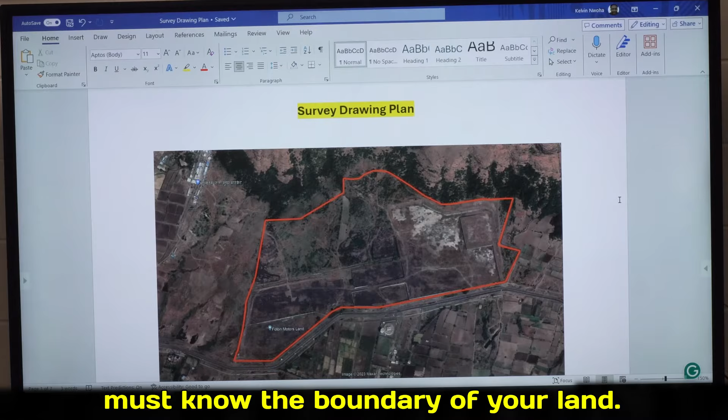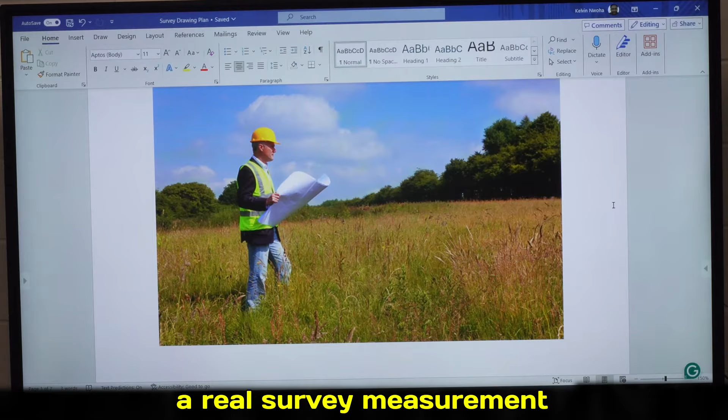If you work in the construction industry, you discover that the work of a surveyor is very important. You don't construct to go into somebody else's property. You must know the boundary of your land. When you call a surveyor, he will go to the land and take a real survey measurement using surveying instruments. They will record it. Then you should think of positions where the property will be.

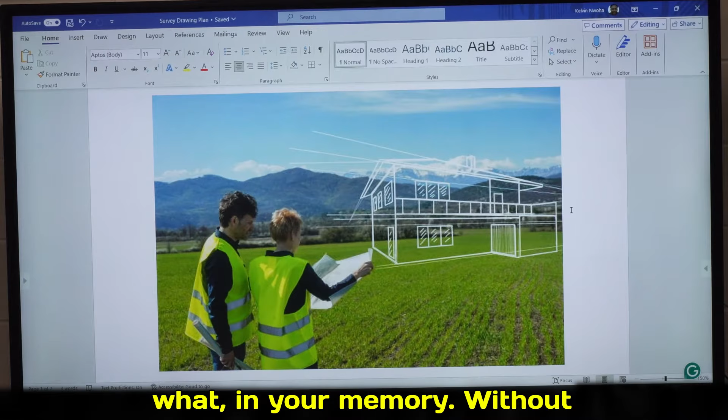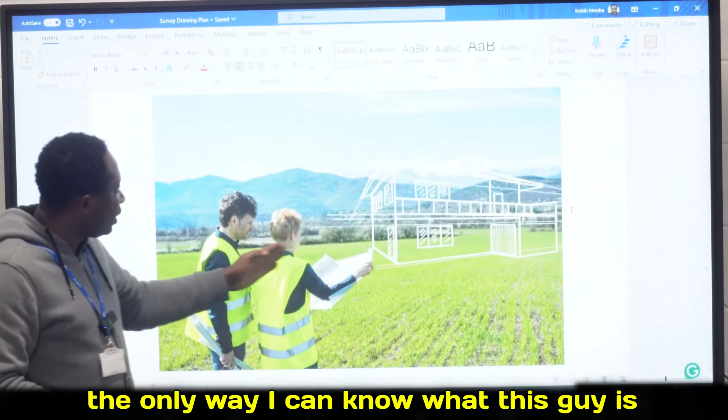Virtually, you are planning. Everything is happening where? In your memory. Without drawing, how will I know what this guy is thinking? What you're seeing here is happening in his head. He's thinking: this is the land, this is what I want to do. If this thing is in this guy's head, the only way I can know what he is thinking is through AutoCAD or any other CAD software, because this is virtually happening in his memory. He's looking at this paper and thinking this. That's why it's important that everybody should know how to draw.

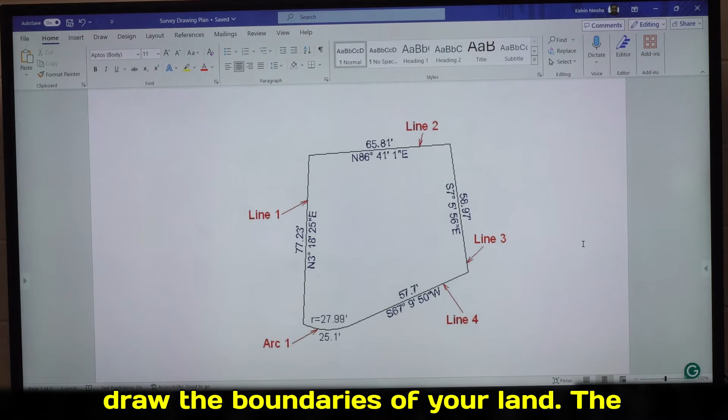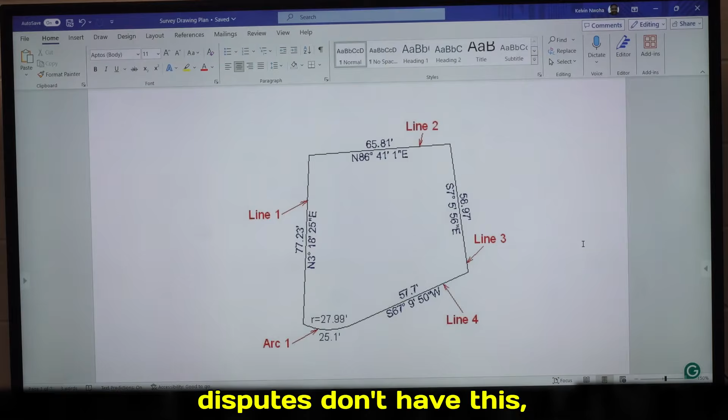The next thing you should be looking at is, how do you draw the boundaries of your land? The surveyor has come to the land, used his instruments, and gotten all the dimensions. There could be land disputes in the future. The reason why the United Kingdom and many parts of Europe have less land disputes is because of this on the screen. Many countries that have land disputes don't have this. They just rely on, my father told me that the boundary was there, and they will start fighting. And before you know what's happening, two villages are already fighting because of that land, because they don't have a record of survey boundaries.

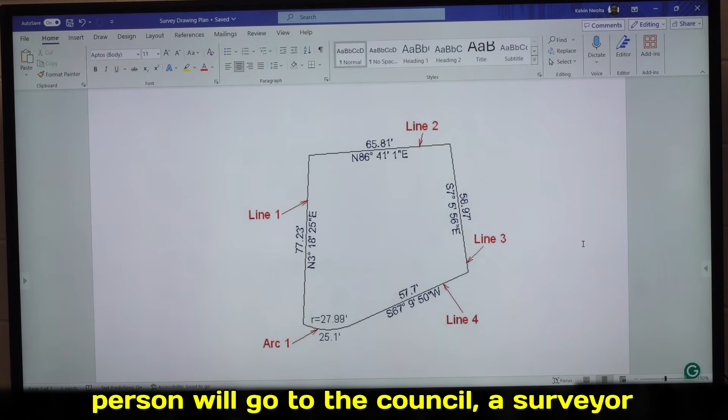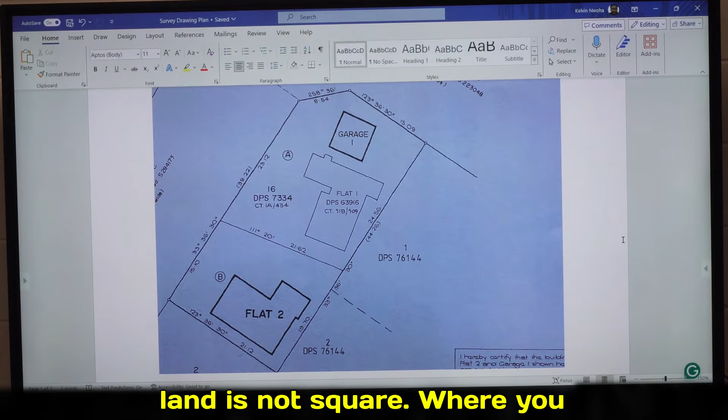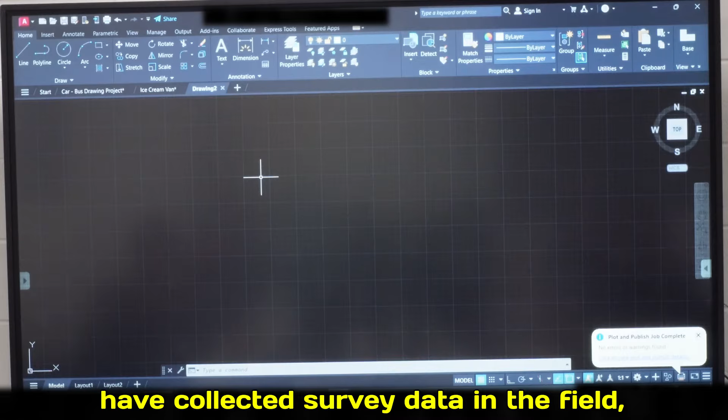In the UK, if you trespass, the other person will go to the council. A surveyor in the council will bring out this, and in court, they will tell you who trespassed, because the records are there. You can use CAD to design how you want your land and the buildings to be arranged. No land is perfectly square. It's your house that is square. The land is not square. Where you live, the land could be like this. What we want to look at now is how you have collected survey data in the field, and you now want to represent it in AutoCAD.

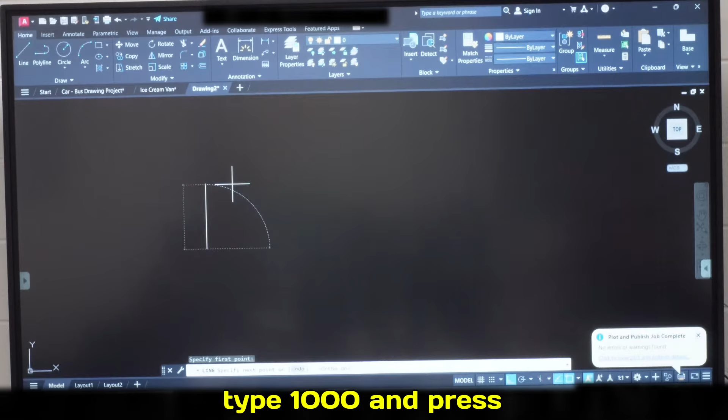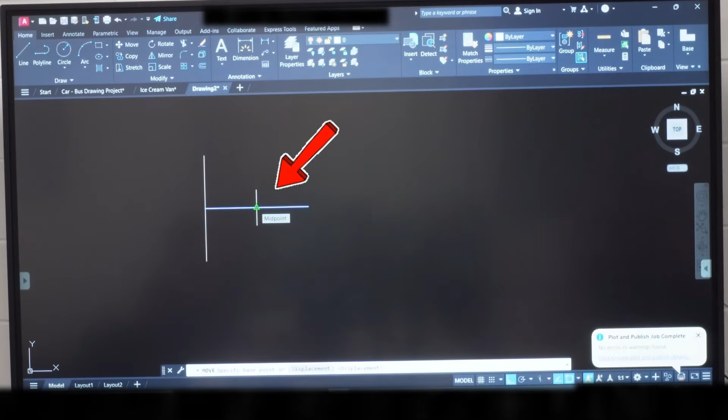I will turn off my grid lines, but before then you open a new CAD environment. Step number 1, pick the line tool. Pick a point. Next, make sure your ortho is turned on. Direct your mouse up, type 1000 and press enter twice. Next, pick the line tool again. Locate the midpoint. Click. Direct your mouse towards this direction. Type 1000. Enter twice. Next, click this. Click move. Locate this midpoint. Click and click this end so that you have a cross like this.

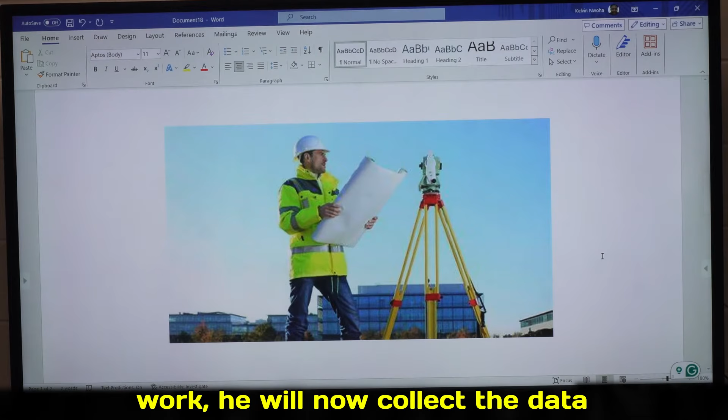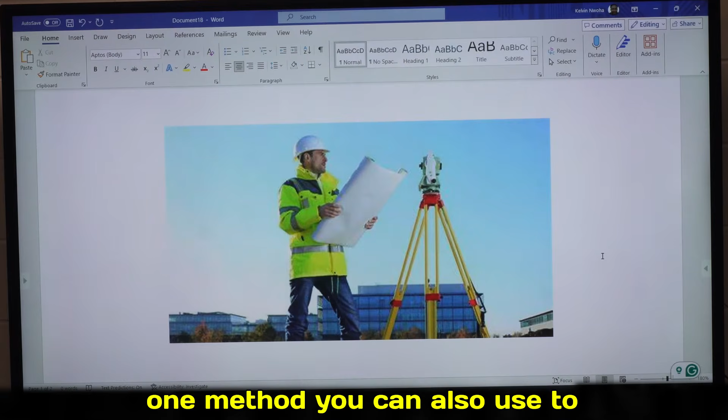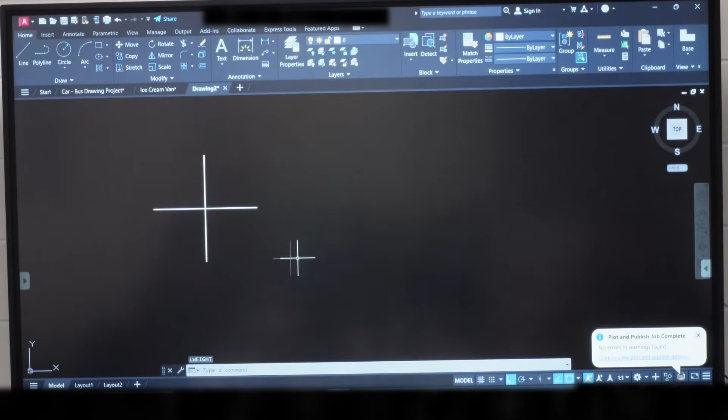After a surveyor has done his work, he will collect the data and go back to the office. There are many software that can help, but this is one method you can also use to represent what you have collected on site. This is a station. I will highlight this, go to line weight, choose 0.3. Type line weight. Press enter. Check display line weight and click OK. I will highlight this. Change the color. Let me just go for yellow and press escape. I will highlight this, type group and press enter. This is station A.

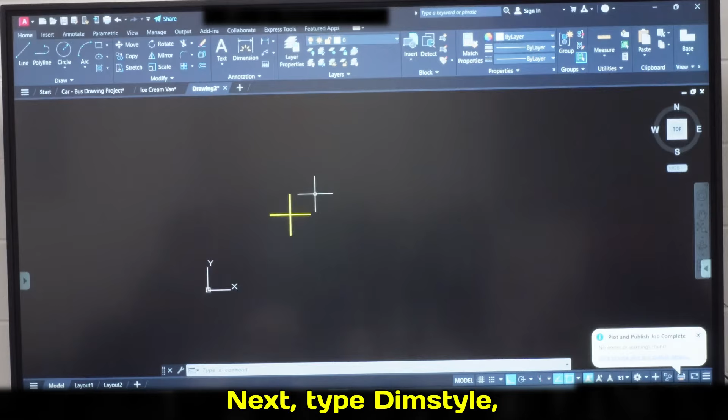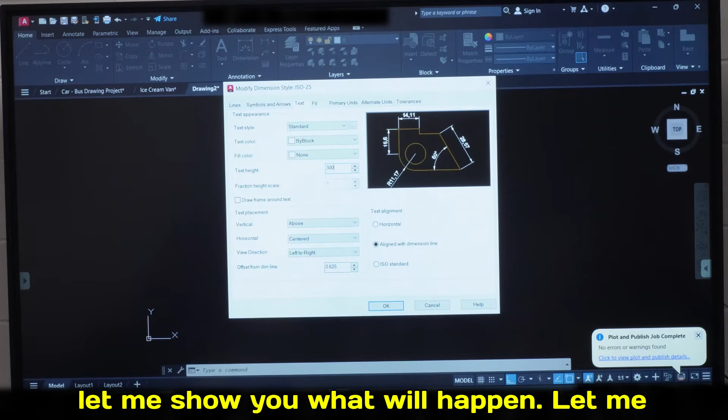Next, type dim style. Dim style is dimension style, and press enter. Click modify. In this dialog box, click text. Change this text to 300. If you don't increase this text, let me show you what will happen. Let me cancel it. If I come here, you see text, and I click multi-line text. I click here. I will type capital letter A. If I type capital letter A here and click close, do you see that it's so tiny here?

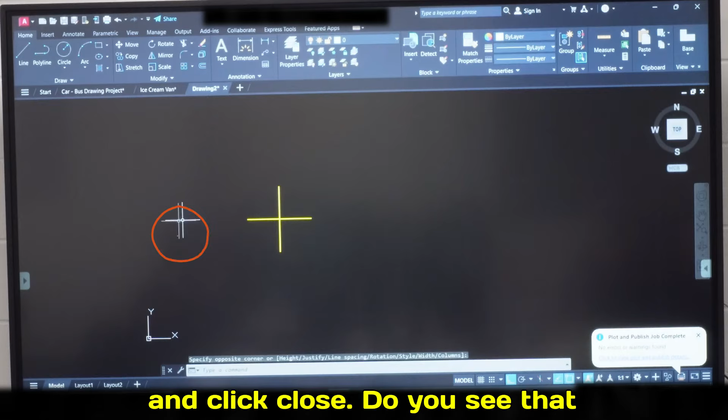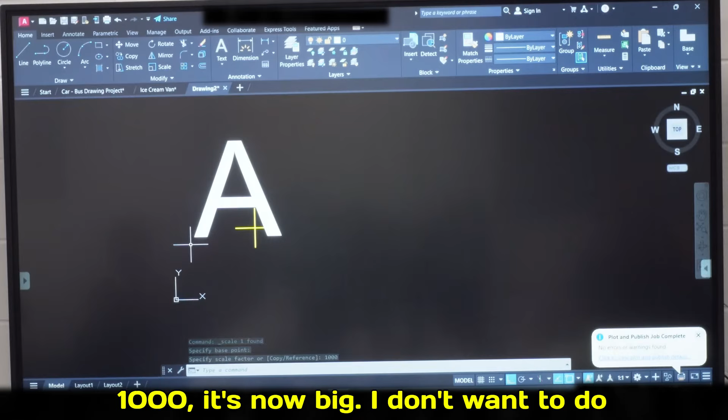If I keep zooming in, it's there. The only way I can make this big is this. I will click this. I will say scale. Click on it. If I type 1000 now, I've scaled it to 1000. It's now big. I don't want to do this. That's why I want to go and change it before I type it. I will click this and delete.

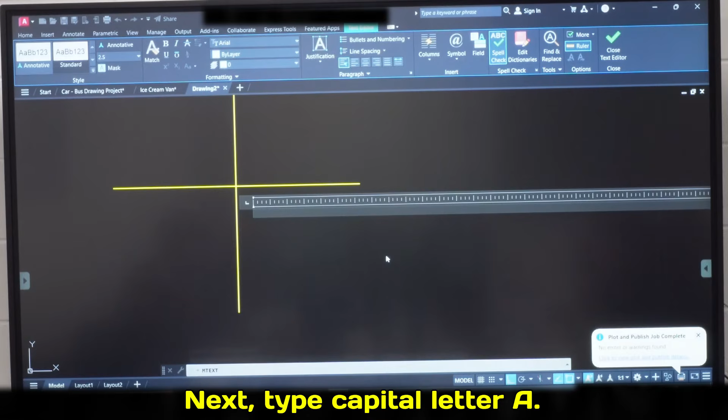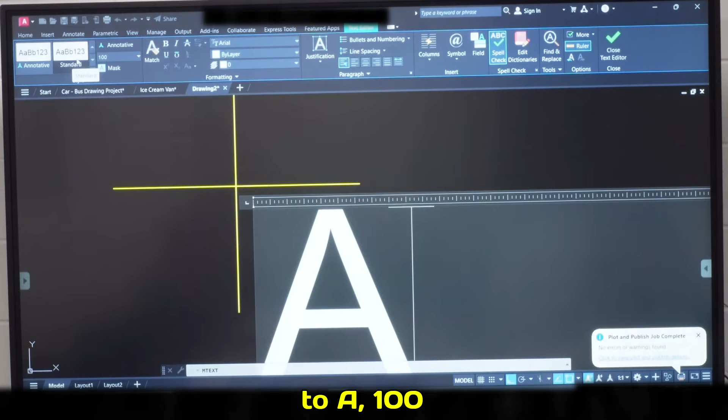Everybody click on this multi-line text. Click twice, 1, 2, and release your hands from the mouse. Next, type capital letter A. You see here 2.5, but you have to highlight this and we're going to increase this. So I will highlight this A. I will change this to, let me say 100, and press enter. 100, close. Can you see I have increased the text? Then you close. I will click on this, click scale. Click on it and type 3. So I've increased it and scaled it up to 3. So let's leave this here.

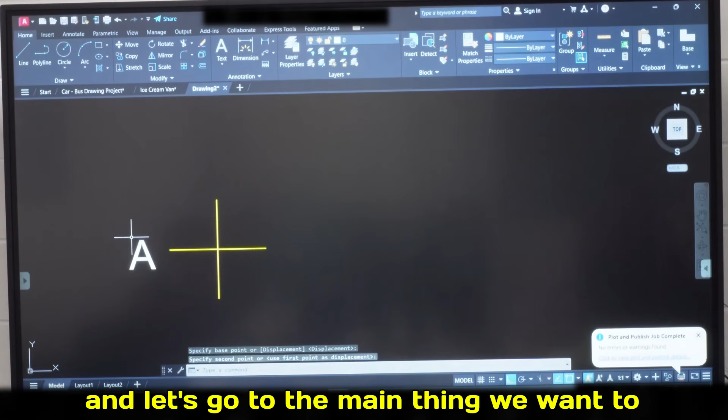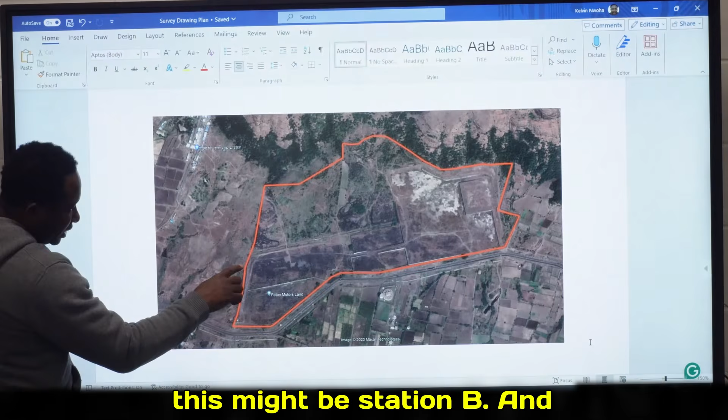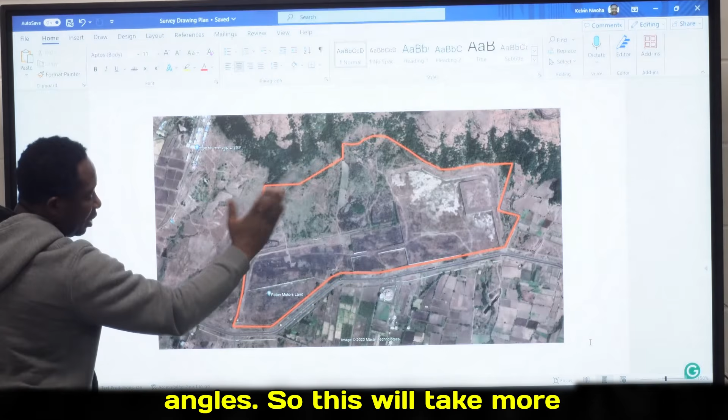And let's go to the main thing we want to do here now. The A means station A. Now I am moving from station A to station B on the boundary land. This is station A of the property. This might be station B. And this is station C. Station D. So here we have so many points. Each will have a different angle, so this will take more time for the surveyor to complete. If it is square, it will be easier for the surveyor. From station A to B is 38 meters, which is 38,000 millimeters.

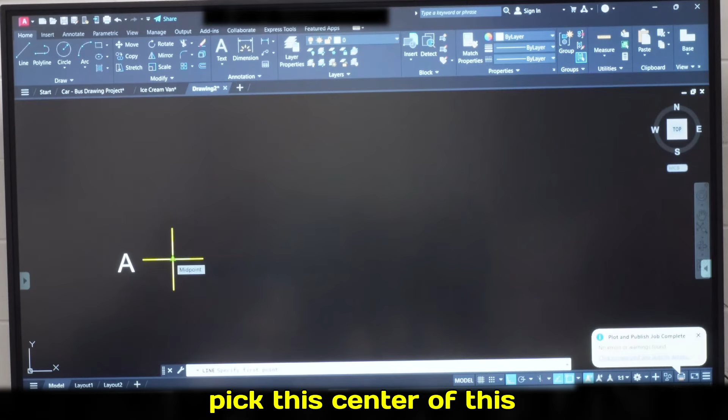I will pick line, pick the center of this cross. I will direct my mouse up, type 38,000 and press enter twice. Next, I will click this line, zoom in. I will click rotate.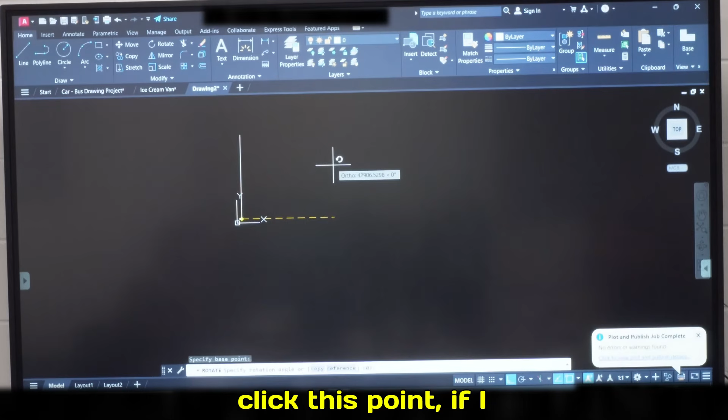Click this point. If I type 33 degrees, AutoCAD will move in the anti-clockwise direction. Watch. If I type 33 and press enter, AutoCAD moved in this direction. But I have entered somebody else's property. I will do Ctrl Z.

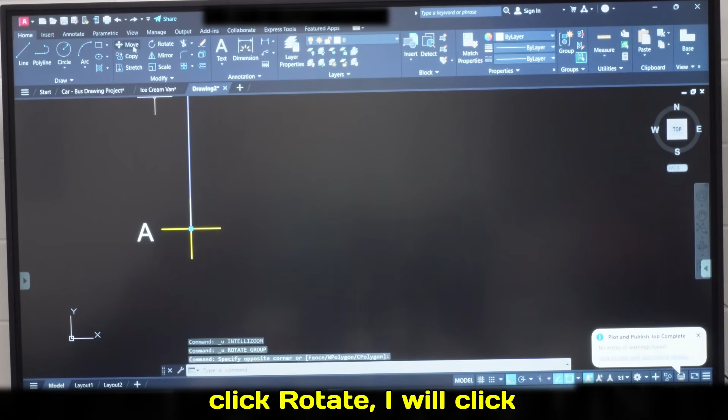I will click this, click rotate. I will click this point. I will type minus 33. Press enter. This is the direction of my property now. Let me move this off here. This is the direction of my property. Let me check if it is correct.

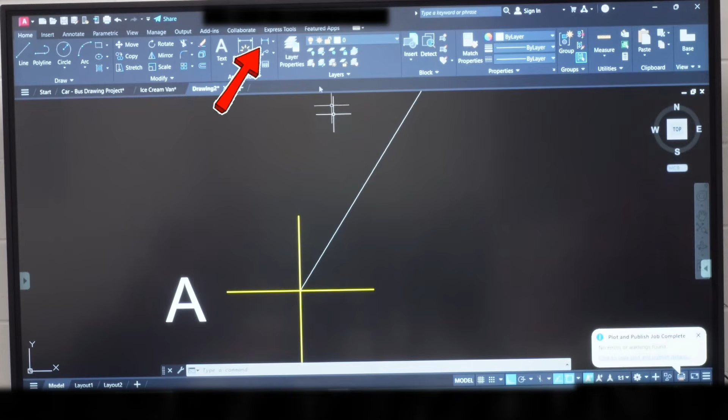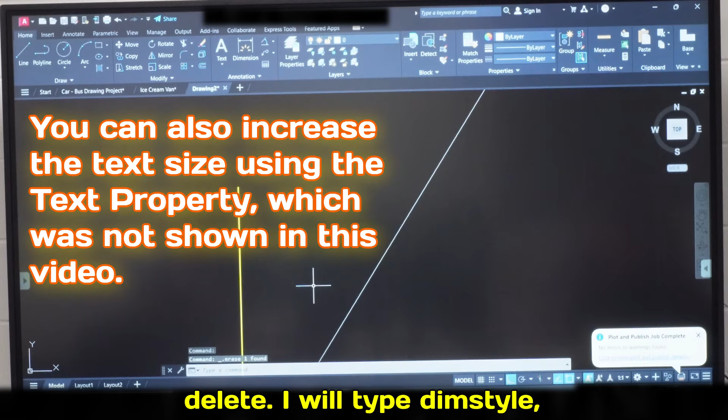I will come here and click angular. 1, 2. Now I will increase this 33 degrees. That's the direction of my property. For me to increase this, you see this is tiny. If I want to increase this, I will delete. I will type dimstyle. Enter. I will now click modify.

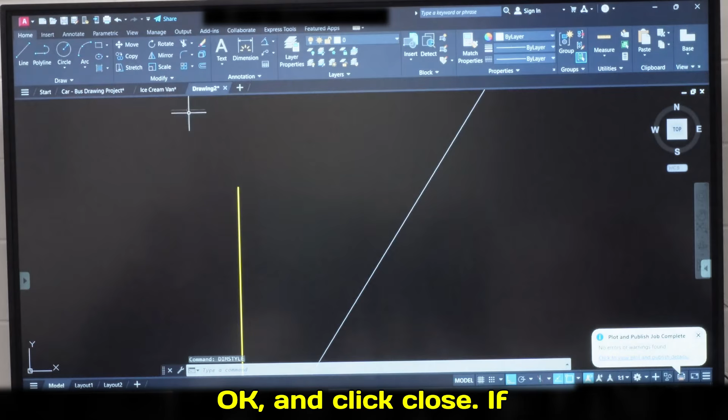Go to this text. I will increase this text. Let me say 300. I will increase this arrow to 100. Click close. OK, and click close. If I do this again, you see, it's now big. I think I will even reduce it. That 300 is too big.

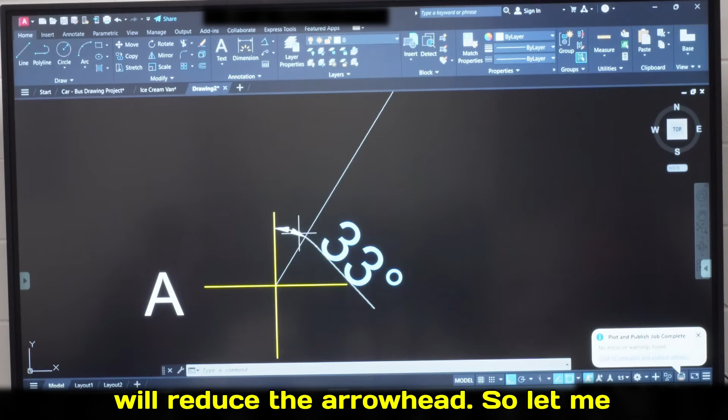But at least I can now see my text clearly. I might reduce it to 100. It's just too big. And I will reduce the arrowhead. So let me click this, delete, dimstyle. Let me go and reduce it, modify. This arrowhead, I will reduce it to 50. The text, I will reduce the text to 200.

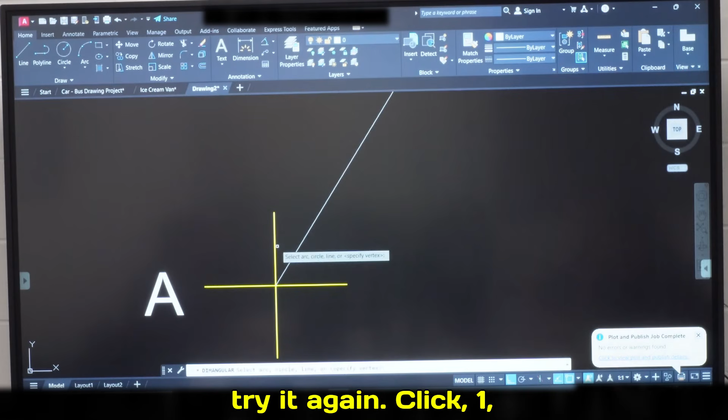OK, close. Let me try it again. Click, 1, 2. I think it's a bit smaller now compared to before. I will click this, click copy. Click this midpoint and go to the other end of the line, click and press enter. Now I am in this position.

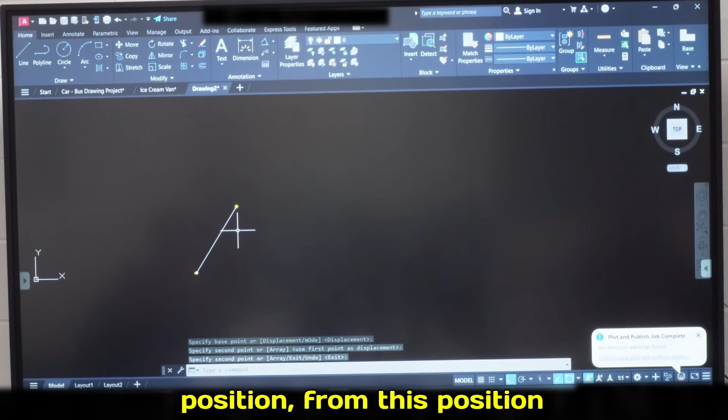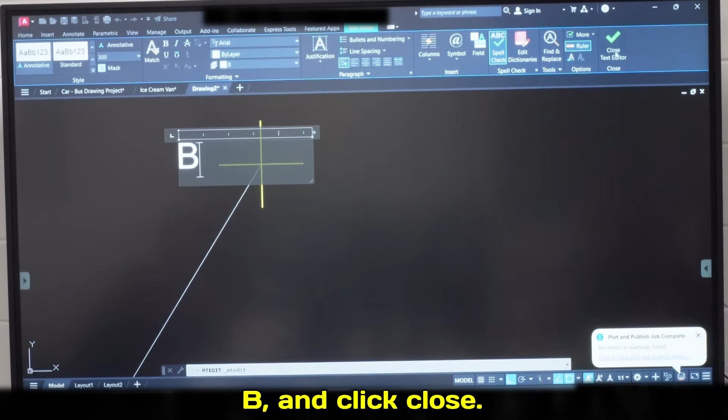From this position of A, I will click, copy. I will copy this A and go here and click, enter. I will move this off a bit, double click this and change this to B and click close. So now this is station B of the land and this is station A of the land. In this station B, B to C is 9 meters.

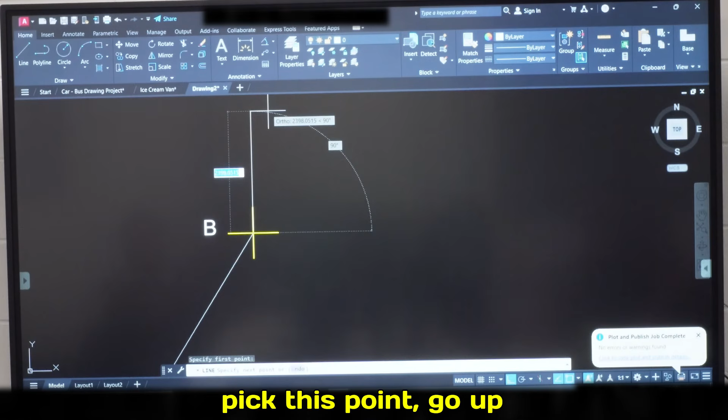I will click line, pick this point, go up 9,000, enter twice. From B to C is 65 degrees. I will click rotate, pick this point, type -65 and press enter. This is the direction of the property. I will click here and I'm going this way.

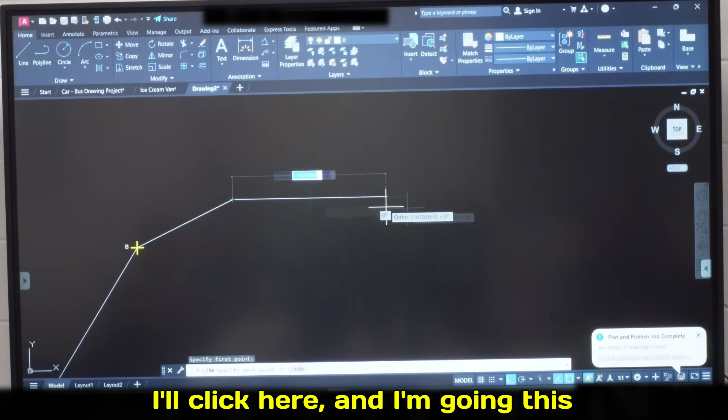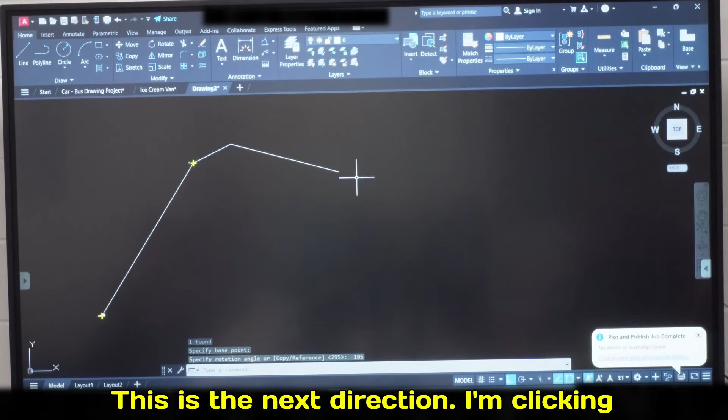From C to D is 24,000 millimeters. I will enter twice. Click this, click rotate, click this point, -105, press enter. This is the next direction. I'm clicking this, click copy. Pick it from here, drop it here. This is C and this is D.

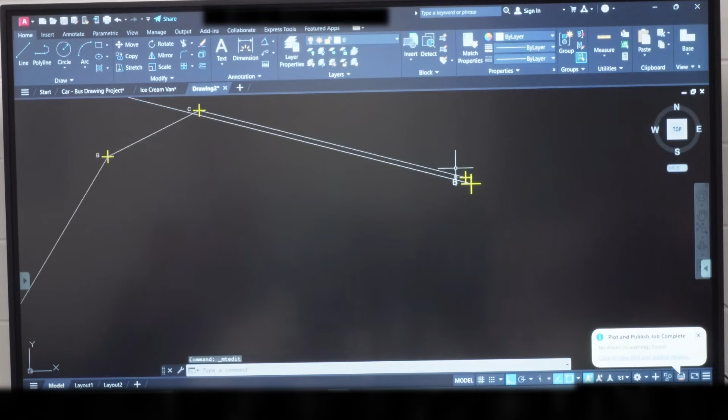Enter. So I will go here, double click, change this to C. This is station C. I will double click, change this to station D. Next, I am moving from D to E. D to E, click the line command, pick this. This is 52,000. Enter twice.

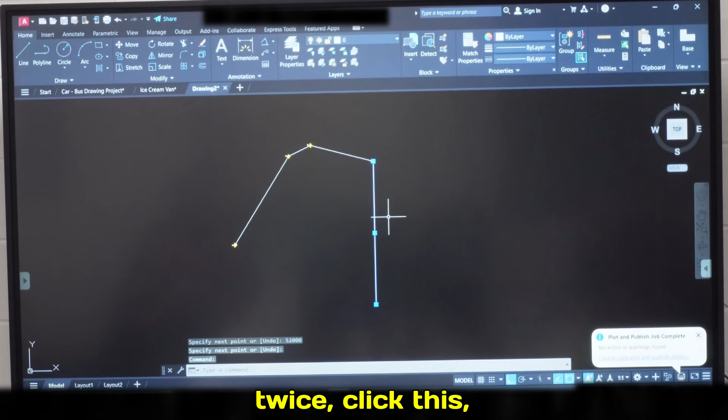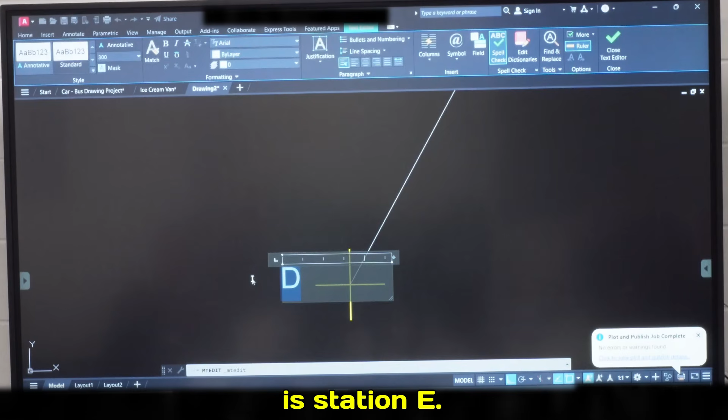Click this, click rotate. Click here. This is -30 degrees. Enter. Next, I am now in this station of D. Click this, click here and enter. This is station E. E to A, I'll just pick a line, click this station, and click this station and press enter.

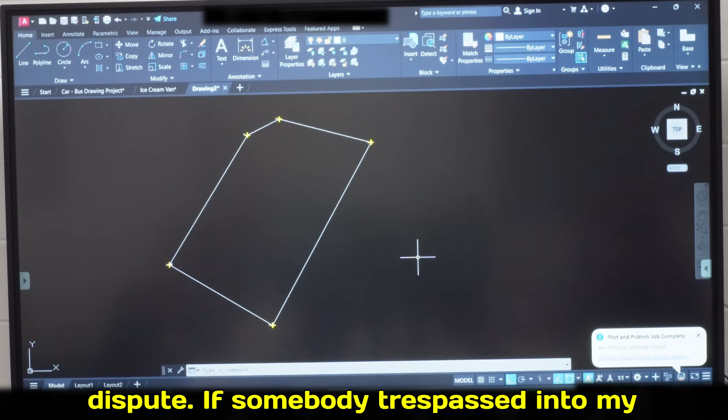This becomes my property, measured. I can use this for any land dispute. If somebody trespassed into my land, I can bring this out and the whole measurement will be checked and they will know who trespassed into the other person's property. This is where you can decide to divide the property into how you want to develop it.

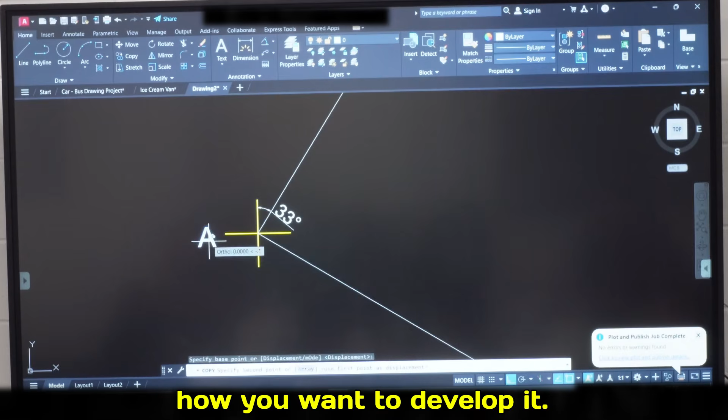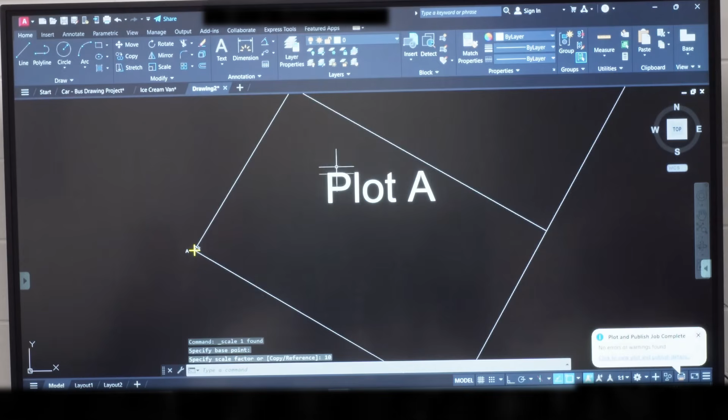I can say plot A, click. I can scale this to 10. This plot A, and I have here as plot B. You can decide to start developing plot A first, and in the future you want to start developing plot B.

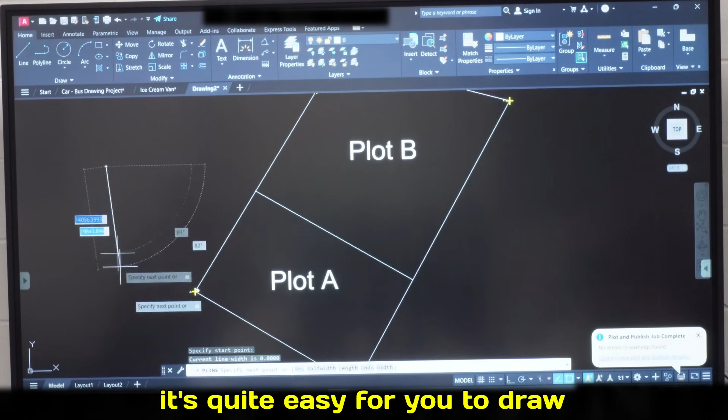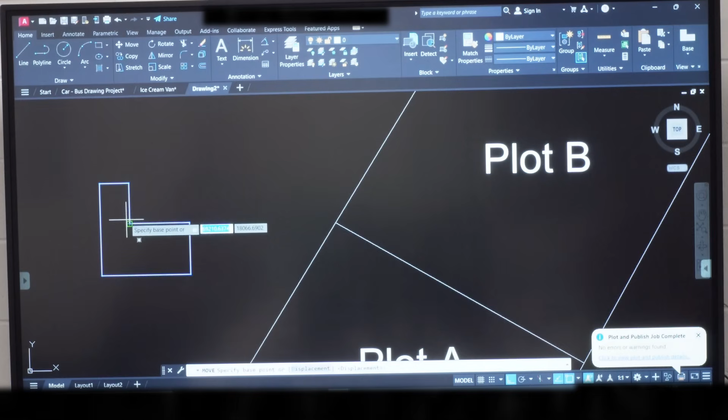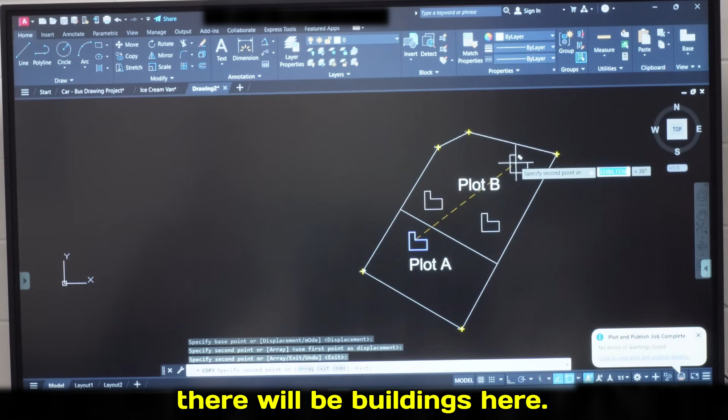If there is an existing house here, it's quite easy for you to draw. Either this sketch is just showing that a building will be located there. You can drop this here and scale this down to 0.5. I can copy this. There will be buildings here. This is how probably you want to develop the land.

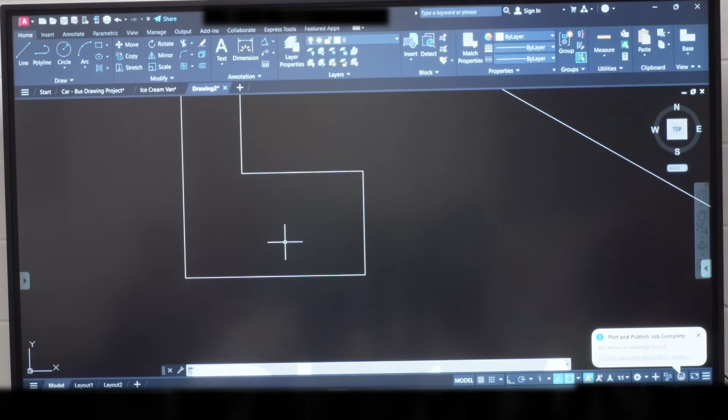Positions of the building. And you're going to measure all this for the architect to know, okay, there'll be a building here, there'll be a building here. Then you give the architect the measurement. The architect will now go into one of these areas and begin to develop it using the measurements from the surveyor. In one of our classes, we're going to start developing this land. What we just learned today is how to draw your land layout.